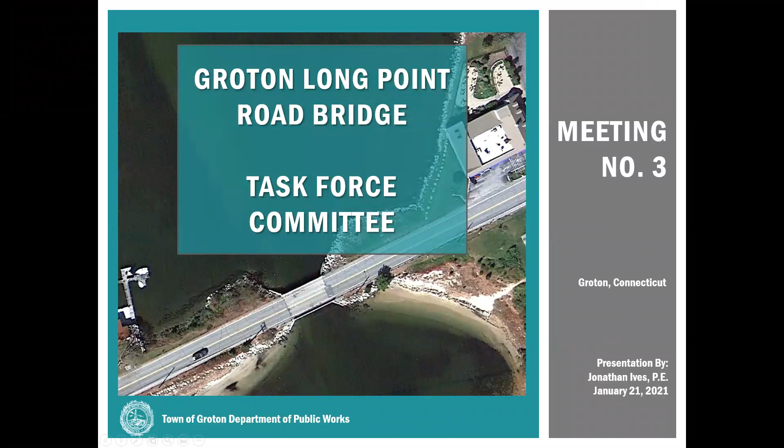All right, I'm sharing my screen here. Is everyone seeing the title page of the presentation? Yes, okay very good. All right, you know both of us at this point.

As Greg mentioned, we'll quickly go over the roadway typical section, and then we'll really delve into the profile tonight and what the design criteria are, so everyone has a good background on that, and what the right-of-way impacts are of meeting that design criteria or some kind of compromise thereof. Hopefully that'll generate some discussion and give us some direction going forward. So that's the major goal for tonight.

The typical section we discussed briefly last time. The minimum width for the roadway here will be based on ConnDOT design criteria and construction staging, and we come up with the same width needed for both. We're proposing two 11-foot lanes, two 5-foot shoulders which will double as bike lanes, and one 5-foot 6-inch sidewalk. The limits of where that sidewalk starts and ends in relation to the project limits are to be determined. Right now we're assuming that the sidewalk basically starts at the bridge and continues east to Esker Point Beach.

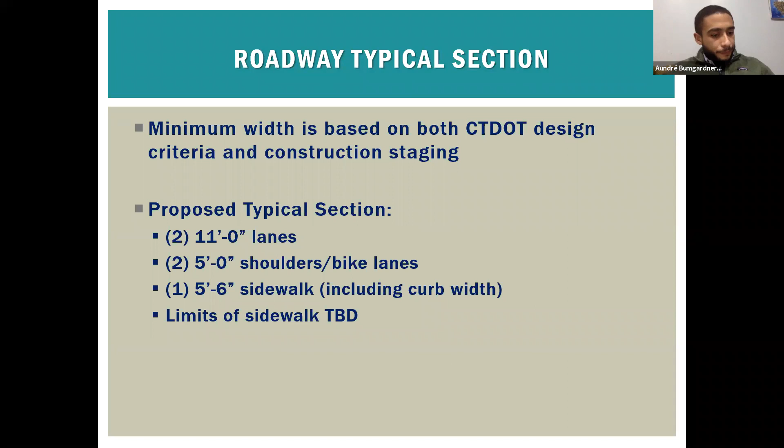Yeah, this is Dave McBride. That's a great point, I'm glad you brought that up. In the busy season it's not as much of an issue, people slow down because it's busier, but in the off season it does — people tend not to slow down once they cross the bridge from the rail bridge. So if that was feasible, that would be something we should probably consider.

Yeah, this is Clarence. I do go by there almost every day, living in Mumford Cove. I think cars do go slower in the summer — there's kids on the bridge, it's narrow, and people do slow down. Coming into Groton Long Point, cars tend to go slower because they're coming up to a stop sign anyway, and the speed limit's 25. It drops to 25 just before, as you come around the curve just over the railroad tracks.

But leaving, I think sometimes people do speed up from the stop sign in the off season and go over the bridge faster than 25 miles an hour, but not much more.

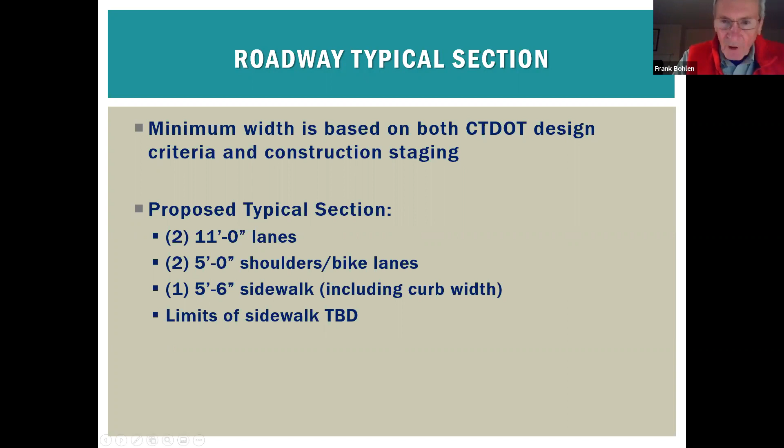And this is David again — do we know what the width is currently, as a comparison? I just told you, I measured it at 32. Bohlen measured it at 32. So there's no change in the actual width of the lane from the current — it's 11 feet currently.

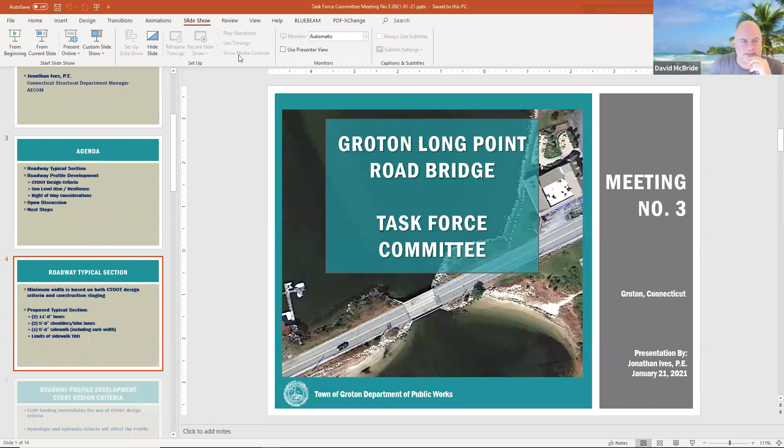Is that safe to assume? Probably — I'm gonna guess at 12 foot now, because that's pretty standard from state highway design back in the 50s, 60s, and 70s when it was put in.

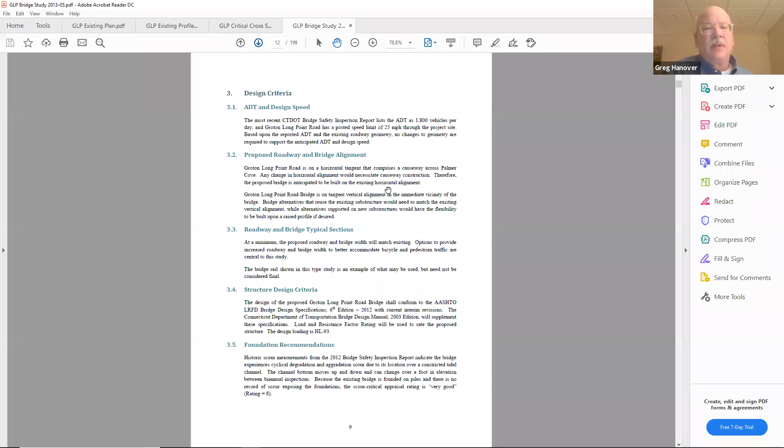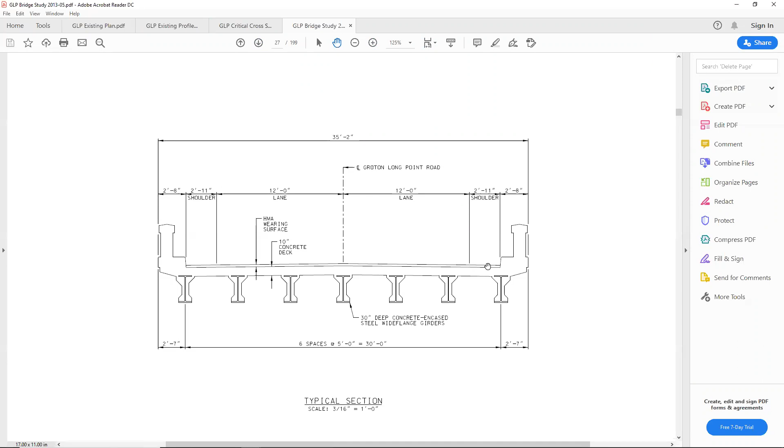Forgive the scrolling, this is what I had for the existing condition. Yeah, it's 12-foot lanes and 2-foot 11-inch shoulders. And you do have striped shoulders out there now. So yeah, that's about right.

Thank you. Yeah, I can also check with our police department — I know we did a traffic study or count study a couple of years ago at this location for this project, and I'll see if we actually captured average speeds and stuff as well, if that's helpful to you, John.

And I can offer this too — what we're showing is the minimum width that we think we need for stage construction. But if you had 11-foot lanes and 5-foot bike lanes, nothing would stop you — even if that's what the state said, okay, why can't you have 11-foot lanes? Nothing would stop you from coming back later and striping that buffer zone if you wanted to. If you striped for 11-foot lanes and 5-foot bike lane/shoulders to start, and that was what the program made you do, you could always come back and change that — with striping it's easy, right?

Yeah, yeah. In the summer, you could even put some cones down to effectively narrow the lane and keep the separation. All right.

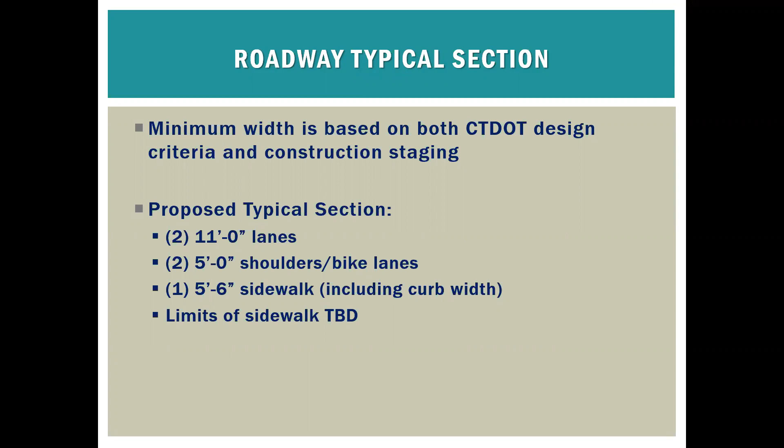All right, so for the profile, we started talking about this at the last meeting. To start, I just want to quickly rehash the criteria — we did get some new information and guidance from ConnDOT. Let me move ahead with that. So because we want to get this in the federal local bridge program to get that 80% funding, that does necessitate the use of ConnDOT design criteria.

And the hydrologic and hydraulic criteria will affect the profile, because that's going to set our minimum elevation with relation to the design flood. So based on the drainage manual and the watershed size, that dictates the design event, which is the 100-year return period event, frequently referred to as a 100-year flood.

And the drainage manual says you need 1 foot of freeboard — that's the distance from the water surface elevation to the edge of road, to the low point on the road — or 1 foot of underclearance at the bridge, which is the distance from the water surface to the bottom of the superstructure, the bottom of the beams that carry the road over the channel. Was that an 'or'?

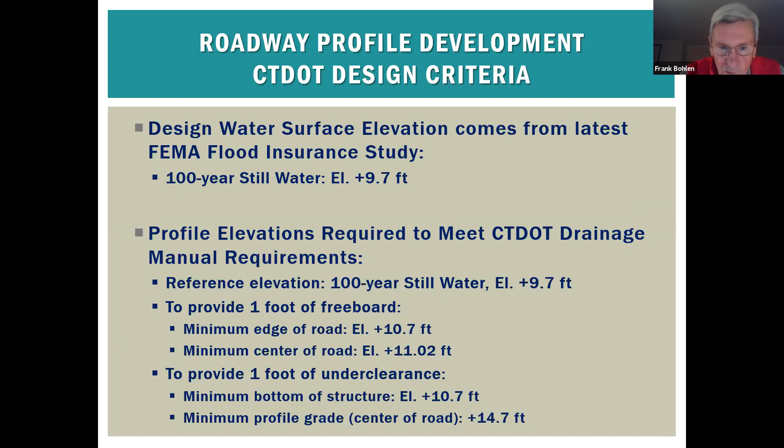As we said before, the design criteria can be waived or relaxed based on economics, environmental impacts, constructability, and right-of-way impacts, which come into play here. Maybe for clarification, what we're talking about here is not just the bridge, it's also the roadway coming to and going away from the bridge. So within our project, we're going to have to address a certain amount of roadway on either side of the bridge just to make up a reasonable profile. You can't pick up the bridge and not pick up the causeway adjacent to it.

So I have a question, this is Clarence. What is the, where, I mean, the 4 point whatever, was that 4.5 square miles, the watershed size, 4.2 square miles?

What's that based on? Because it looks like, to me, in this case, the flooding is coming from the ocean side or the sound side and not from the freshwater side. That's a good question. Even though this is a tidal situation, what ConnDOT uses as criteria for the size of the structure is the watershed size. So you have a 4.2 square mile watershed north or inland of the bridge, and by their manual, that makes this an intermediate structure.

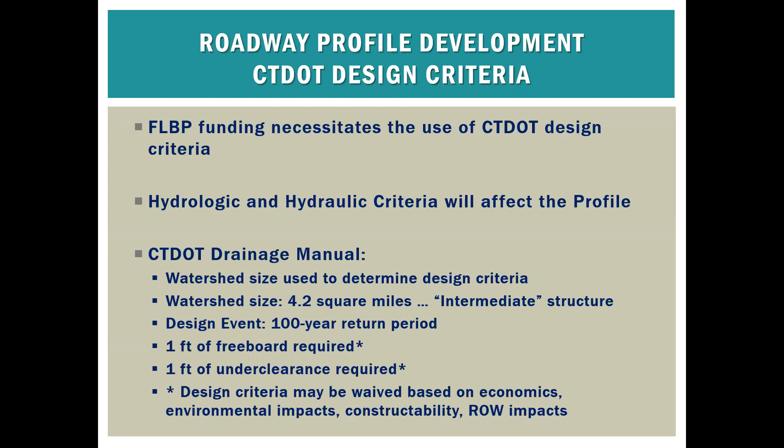If I can just break in for a second, the problem is this is a subject that warrants a little bit of discussion as we get down the road. But one of the problems they have in many of the structures is the post-storm effect. They can't do much about the ocean, it's there, that water is going to get in, it's going to fill up the cove. But then after the storm goes by, the ocean goes down and you've got a lot of water in the cove that's got to get out. And if you look at failure along the shoreline, the majority of the failures you see have happened from the inside out. The structure has fallen into the ocean because they couldn't get the water out, they couldn't support the load from the water in the cove. That's the concern.

Yeah, so that would be a later discussion. Right, okay.

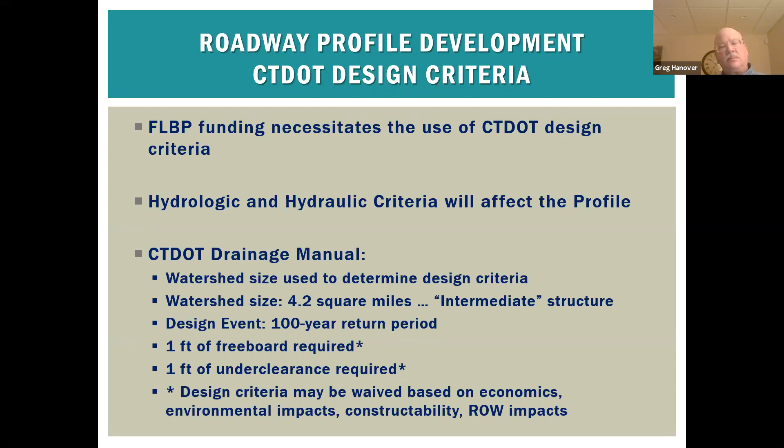So the design water surface elevation based on the drainage manual comes from FEMA, and the latest FEMA flood insurance study has a 100-year still water elevation of 9.7. So for a frame of reference, the low point on the existing causeway is about elevation 8, and high tide is around elevation 1, give or take.

So given that 100-year still water elevation of 9.7, the elevations required to meet the ConnDOT drainage manual requirements would be: 1 foot of freeboard would give you a minimum edge of road elevation of 10.7.

And 1 foot of underclearance would mean the bottom of your structure would be set at 10.7. And, as Frank alluded to earlier, you have some structure depth there. In this case, if we're clear spanning over the existing structure, building a longer bridge founded beyond the existing abutments, our depth could be about 4 feet.

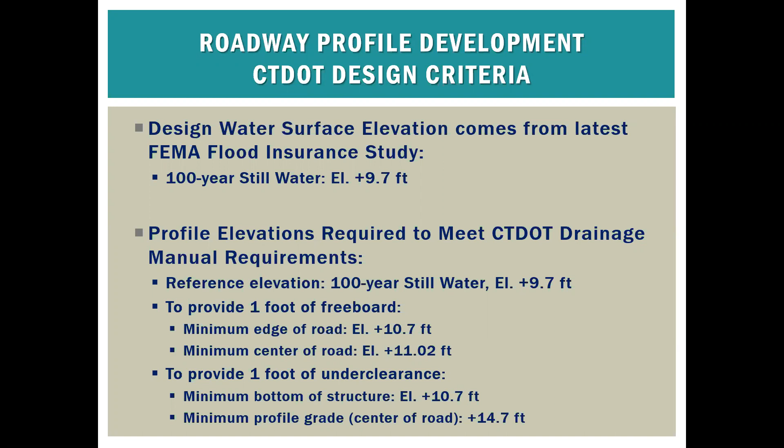So we talked about sea level rise at the last meeting, and I got some clarification from Michael Hogan, who is the head of ConnDOT's hydraulic unit. ConnDOT does not currently require that design water surface elevations be adjusted for sea level rise. Now, that does not mean that we're not going to consider sea level rise in design, but by their standard, their reference elevation is the 100-year flood elevation in the current FEMA study.

That's their current standard. So there is the Public Act 18-82, which strongly recommends that you consider sea level rise in your planning. And basically what this boils down to is the town is free to exercise judgment in how you account for sea level rise. And again, the recommended sea level rise is 0.5 meters, which is 1.64 feet or close to 20 inches. And it's thought that that is the projection for year 2050.

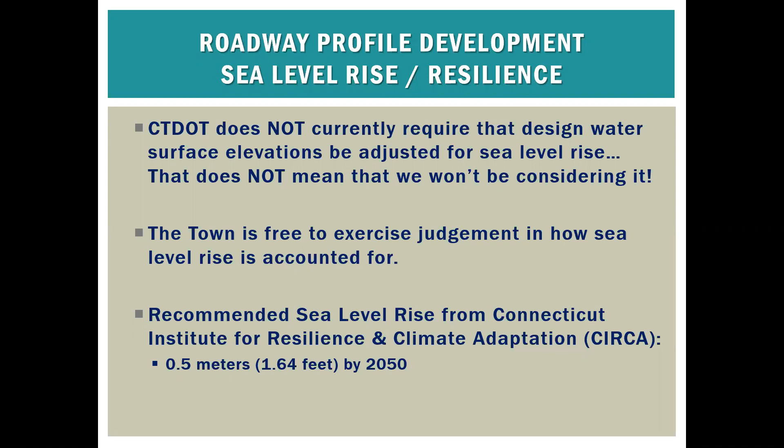So I dug further into the FEMA flood elevations, and this top list here is showing the 100-year still water is 9.7, as we discussed. That means that every year there's a 1% chance that you'll have a flood event that reaches elevation 9.7. The 50-year still water elevation is 7.6, meaning every year you have a 2% chance of hitting that elevation.

Likewise, 10-year elevation is 4.9. That means you have a 10% chance of a flood event at that elevation. And mean higher high water is 1.21. So all of these, the 100-year, 50-year, and 10-year are theoretical design storm events and corresponding elevations. If we add the recommended sea level rise to those elevations, we get these numbers down below here.

This is just projecting that the still water elevations will rise with the sea level rise. And we can, as a suggestion, design to the requirements of the drainage manual, which are...

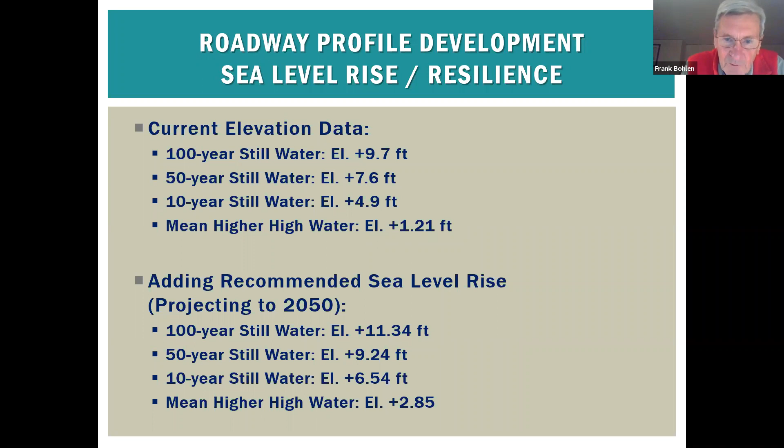Understand. But that's well in excess of your 11.34. So the road is going to be dry in the 100-year storm without adding another 1.5 feet to it. If you were to actually design for that 14 feet and change, I think you'd have some severe right-of-way impacts. So I want to look at those first. Okay, because I know a compromise will be required here. So kind of building up what are the ideal design requirements, and what are the resilience issues we want to look at, and then what are the right-of-way issues. That's the next step. And then we'll have a discussion about what the best path forward is.

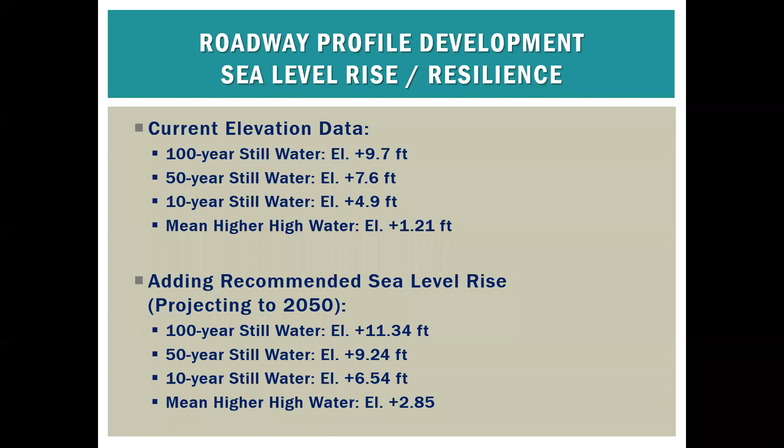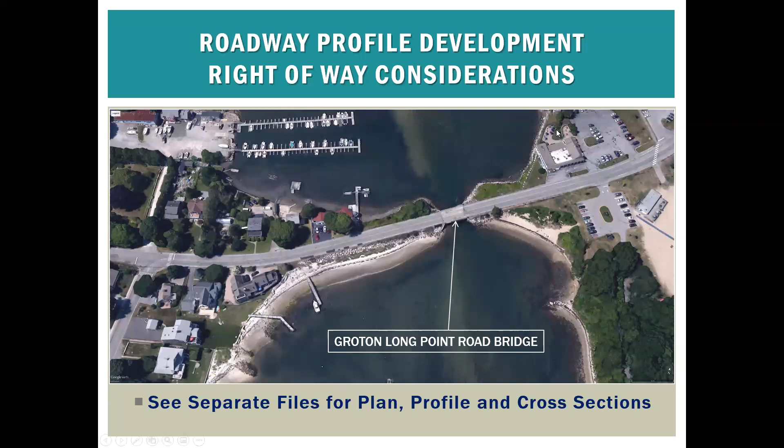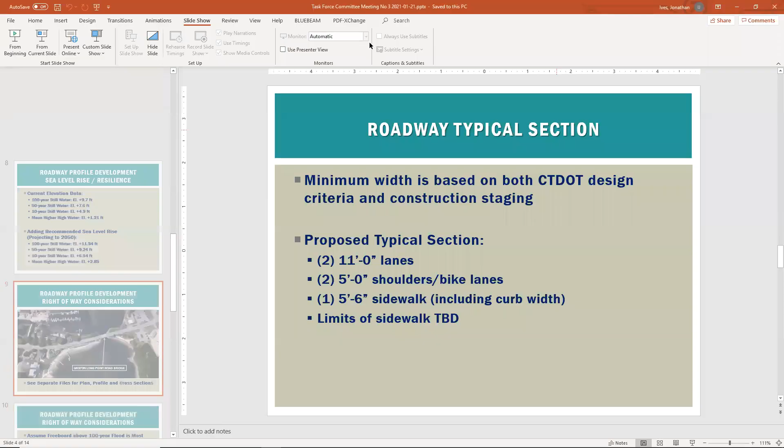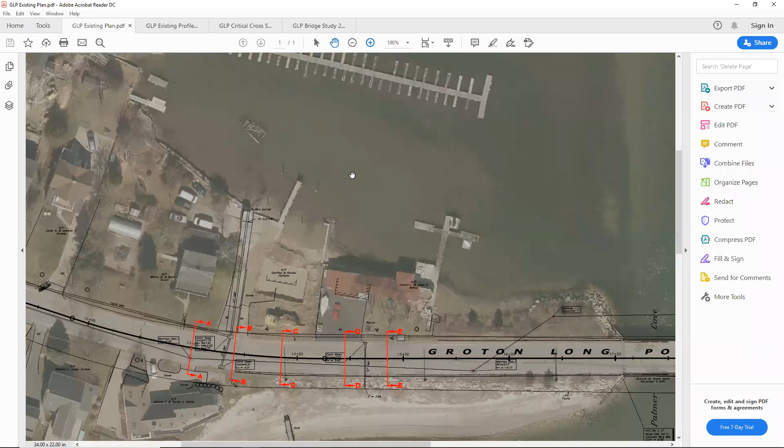So I sent out to this group some separate figures so that you could look at these in detail outside of the presentation. This is where we've cut cross sections. Section AA is at the driveway at 1000 Groton Long Point Road. Section BB at the next driveway, and CC at the next house. Likewise, DD and EE at the next driveway and house to the east.

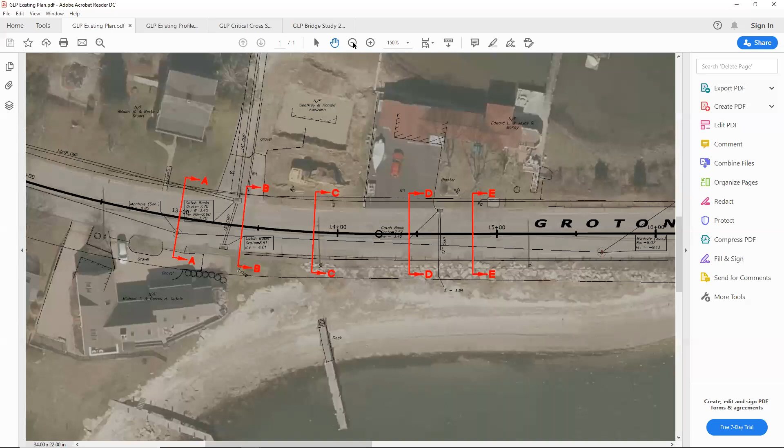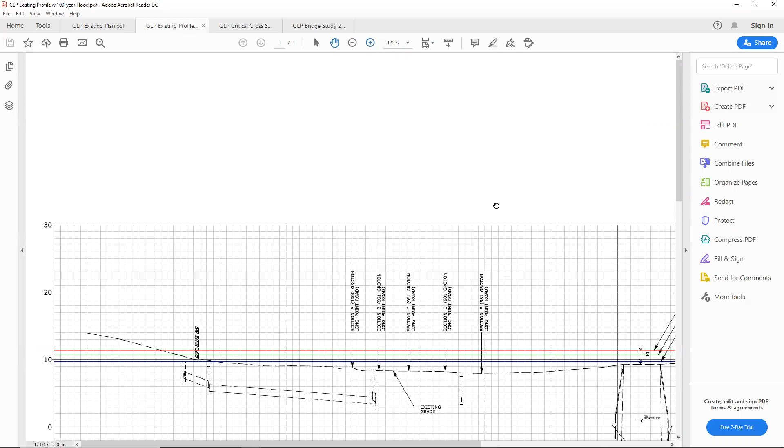Here we have the existing profile of Groton Long Point Road. Here's our bridge and our 5 cross sections that we cut at these houses and driveways. I'm sure these figures may be hard to see on Zoom, but I've got more to follow up.

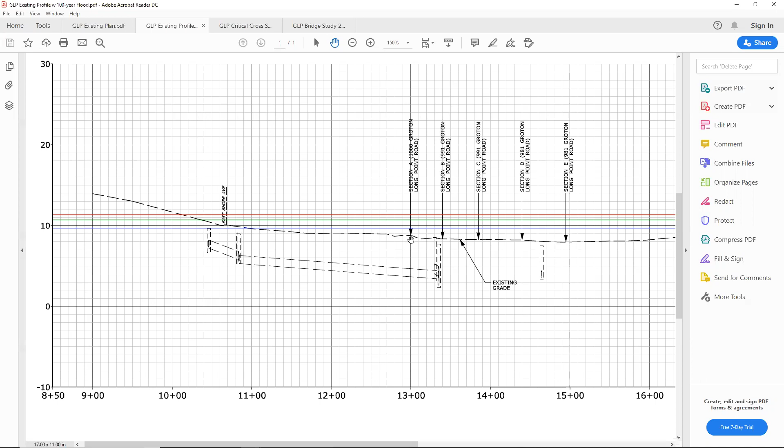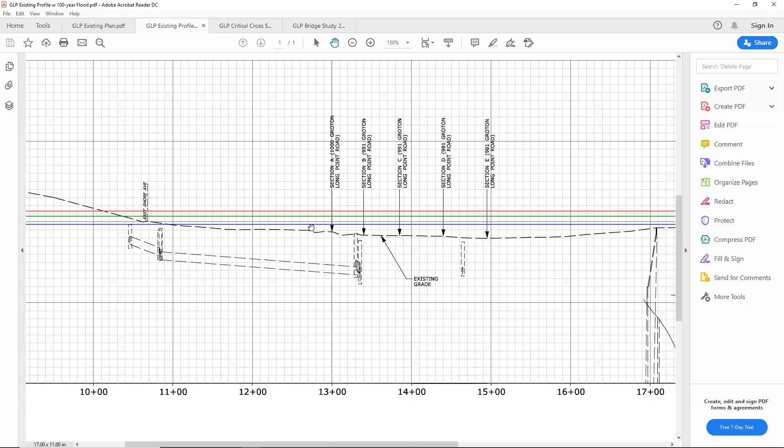The elevation in front of these houses is between 9 and 8 here. The blue line here is the 100-year still water elevation of 9.7. The green line is the 100-year still water elevation plus the 1 foot of freeboard that the drainage manual would recommend. And then the red line above is the 100-year still water elevation plus sea level rise, which brings you all the way up to 11.34.

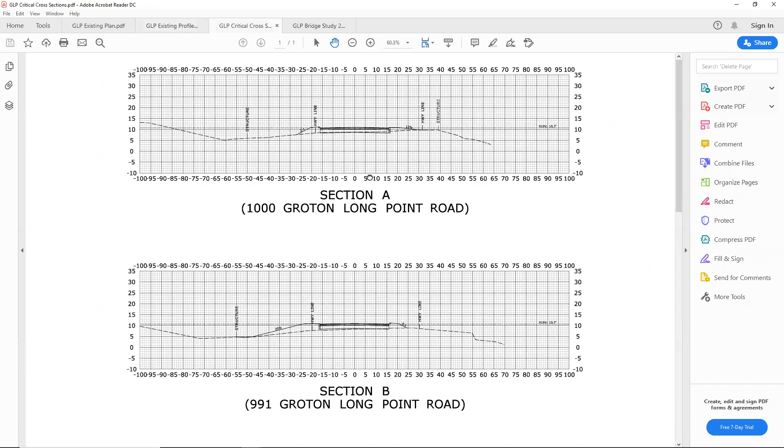Here are our cross sections. What you're looking at is a section taken, like a slice taken transverse to the road. This dashed line is the road. And you're looking east toward Esker Point Beach. The dashed line is existing, and what's solid line work is proposed.

This first section is at a driveway at 1000 Groton Long Point Road. And it looks like if we're to set the roadway for the 1 foot of freeboard here at elevation edge of road at 10.7, we can match in - we're picking up the road a little bit in front of this house, where we can blend in before the property line and the garage.

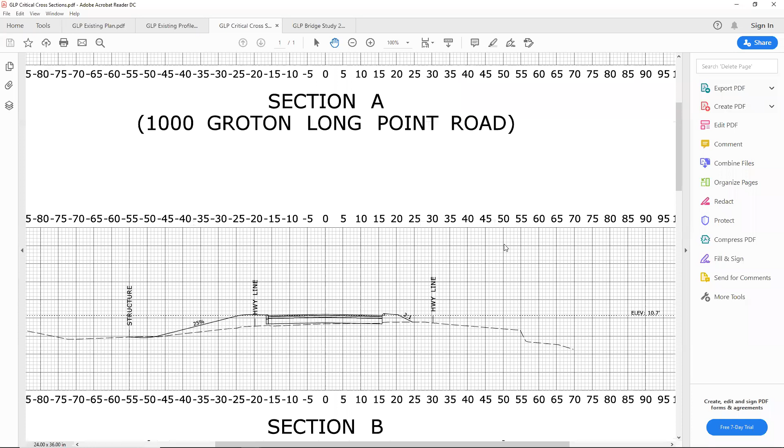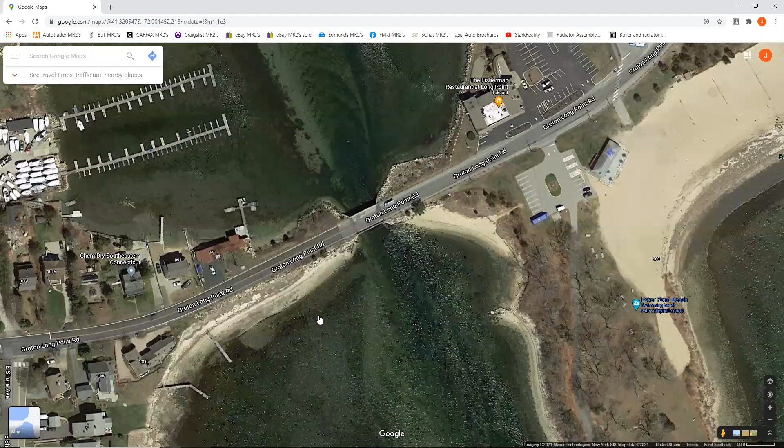Section BB is at 991 Groton Long Point Road. I go to the map here and take a look at 991 Groton Long Point Road. You can see the aerial is in need of update on Google, but here's the current house here. They've got a very expensive Belgian block driveway here.

To meet that minimum 1 foot of freeboard at the edge of road and be at elevation 10.7, this is what the change would be to the driveway here. What we're showing is - I have this in my PowerPoint presentation here - about close to 3 feet of fill. And the driveway would get quite steep. Normal design standard for a driveway would be about 12% grade. And in this case, to have a shelf and a swale in front of the structure for drainage, we're showing a 25% grade on the driveway, which is at most like a 4-to-1 slope.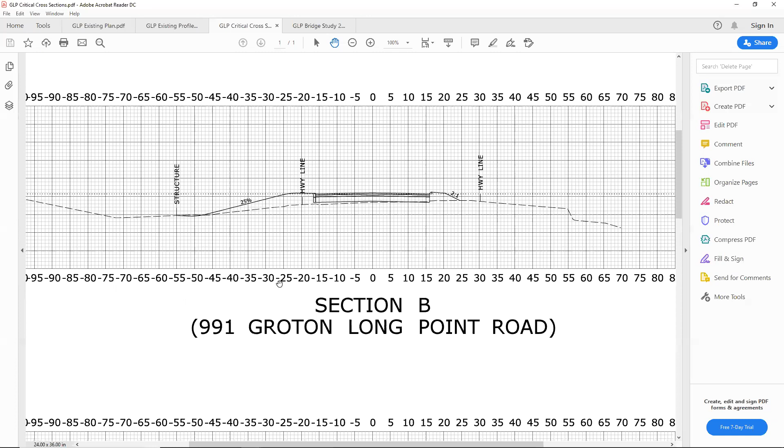So pretty substantial slope. And likewise in front of the house, which is shown on the next cross section, we're showing a 6-to-1 slope because the shelf is not required. But again, about 3 feet of fill in front of this house. And here's the view of the house from the roadway.

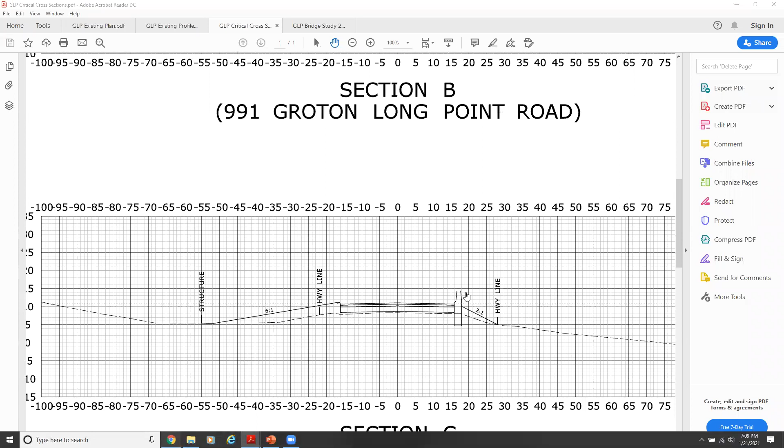And then the next dwelling and the last one before the bridge here is 981 Groton Long Point Road. That's section D and section E. Here we're showing a 20% slope for the driveway. Looks like about close to 3 feet of fill.

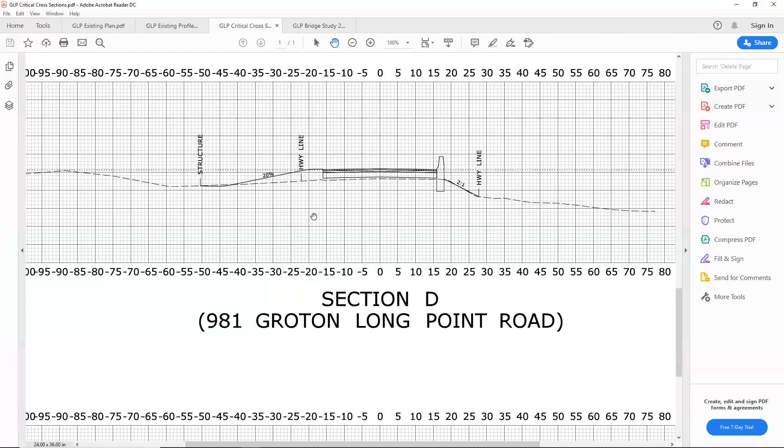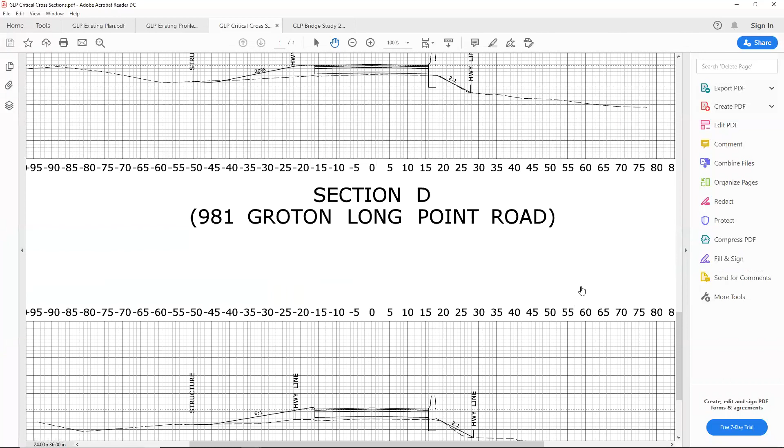Again, a 6-to-1 slope from the roadway down to the house. That means that a 6-to-1 slope is considered to be a maintainable slope for a lawn, which is another design standard. But that means the whole front lawn down to the house will be filled. And again, the whole driveway would be reconstructed just to meet that slope, which at 20% is well beyond the desirable 12%. Now there are a lot of driveways in the state that are well beyond 12%, I'm sure. It's just ConnDOT's design standard.

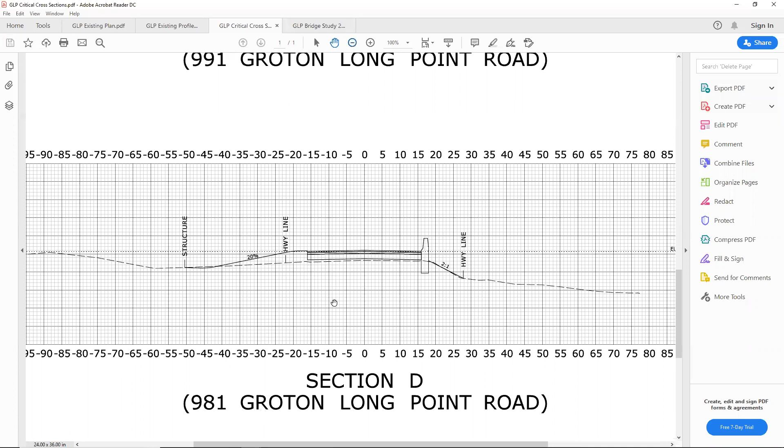So these cross sections are basically just meant to convey, if we try to meet that 1 foot of freeboard for the 100-year flood, what the changes are going to be to these properties and what the right-of-way impacts are going to look like. So we'd be grading well onto the lawns here and redoing these whole driveways. We're filling the road in front of the houses by about 3 feet. And that's substantial and I think worth discussion.

This next slide gives you the approximate fill required to meet that 1 foot of freeboard. This is assuming that we get a design exception from ConnDOT and don't provide 1 foot of underclearance at the bridge. If we provide that foot of underclearance, we'll have to extend that profile out well beyond the bridge to get up to elevation 14 at the bridge, and so these fill depths would increase.

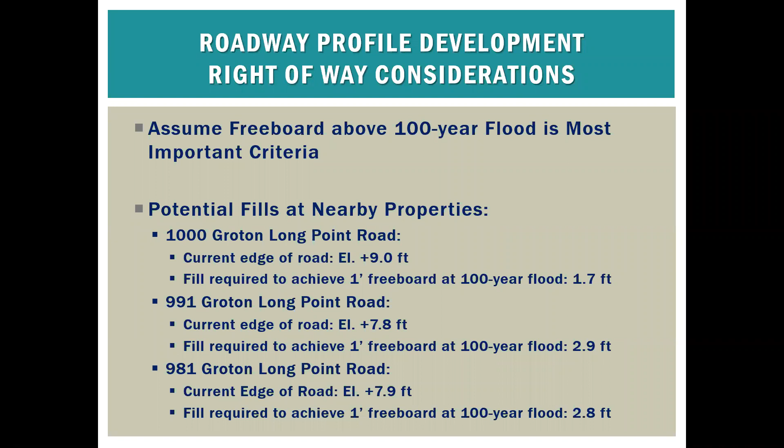This is Clarence. I wonder if instead, I understand the driveways have to be sloped, but is it necessary to slope the lawn, or just to provide almost like a wall instead? It's a good question, we could provide a wall. It's just cost. We could provide walls and landscaping, that might be a discussion with the homeowner.

And also, is it much more costly to relocate the road a little bit more south? It looks like it could be a possibility also. What would be the goal of relocating the road to the south? It gives those two houses a little bit more room from the road.

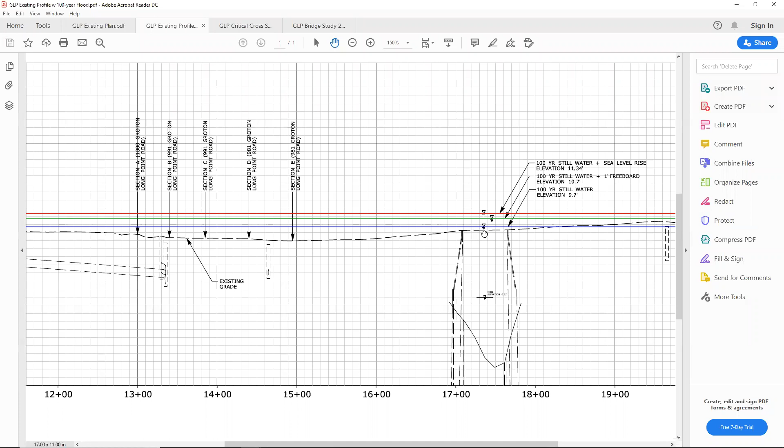What we've done here is to just show the existing profile and the flood elevations and where these sections are cut, so we don't have a proposed profile on here. You can see from this figure that the current bridge is between 9 and 10 at the top of road, so let's say 9.5. And what we've done on the cross sections is to just assume that we're minimizing the profile change to provide that 1 foot of freeboard only and not the 1 foot of underclearance.

Sure. Saying this might be some kind of compromise, and okay, because this is definitely an attainable compromise, what would the right-of-way impacts be? Or do we have to go even further and not provide the 1 foot of freeboard?

This is for open discussion, but we haven't developed a profile that meets the strict requirements of ConnDOT, because we know that they can be relaxed, and we know that looking at these sections, which already have large right-of-way impacts, when we're just trying to get to 10.7, that if we try to get all the way up to over 14 at the bridge, the right-of-way impacts are going to be so much greater that we'll be talking about takes instead of slope easements and driveway reconstruction.

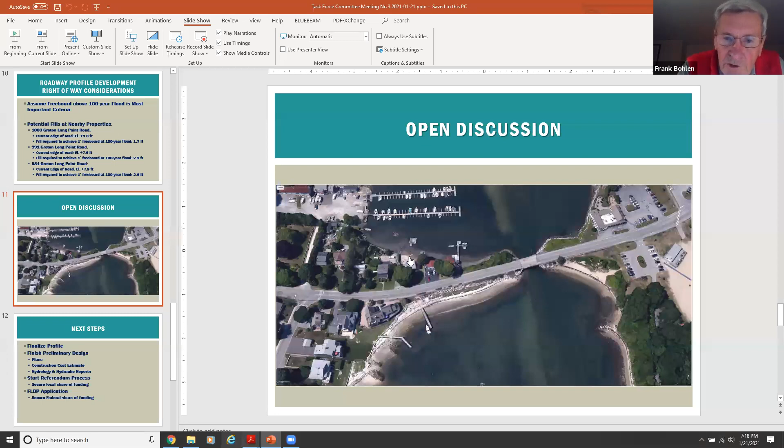Right. Well, if you look at the existing conditions when we have a 100-year storm, a number of those properties are underwater anyway. The existing bridge surface is just about dry in the 100-year storm. And the roadway, as you proceed south and west towards the stop sign, goes down to a low, so that you've got some amount of water on the road in the 100-year storm.

In the current condition, again, that roadway profile is about 8, and the 100-year storm is 9.7, so the roadway is impassable. Right, exactly. But the bridge is just about passable. The bridge surface is you're about at, yes, the 100-year level, 9.7 or something like that.

This is an interesting question, how you go at it. By my eye, the red roof guy, the first one we run into on the north side of the road as I'm coming to Groton Long Point, Mumford Cove, is the worst. It's the lowest lying, so I'd expect the slope to be greatest in that area.

I also think that if you raise the roadway up significantly, that's the house I'm saying you're cutting their view off. It's low, you're cutting it.

If you look at this house, what was here previously was a single-story house. With the new construction, the house has been raised up again, as Greg mentioned to me offline, probably for flood insurance reasons. Could also be for the view.

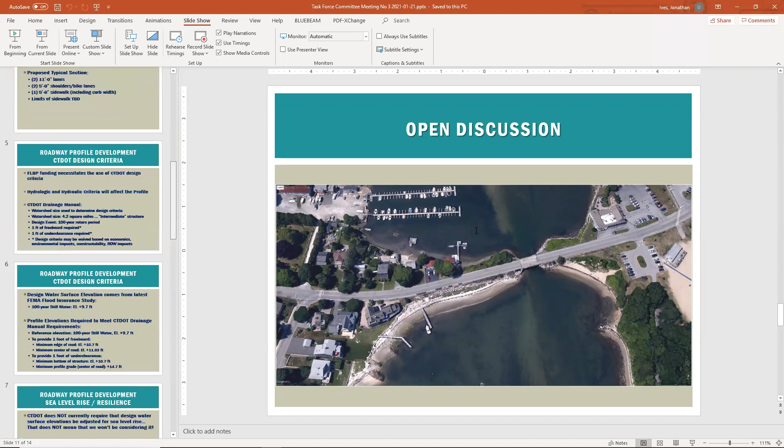I would say that typically at a bridge replacement, at the very worst, we're going to match the low chord of the existing bridge. We don't want to be any lower than the existing bridge. So the existing bridge has a low chord elevation of about, so either 5.6 or 5.7 - substantially lower.

We're talking about picking up - let's say if we had that 1 foot of freeboard as a target, and we said we're going to get a waiver for underclearance. We were at 10.7, and we had a clear span structure that's about 90 feet long. And then that structure is going to be 4 feet deep. That puts us at 6.7. We can probably be a little bit higher at the bridge because we have some room.

We have some room between the last house and the bridge to build up the profile.

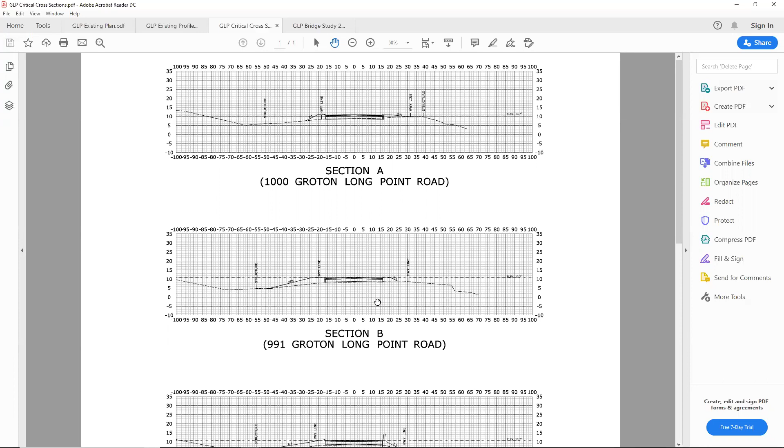Well, if I had to pick a number for a road elevation, for a road surface elevation, it would be on the order of 11.34 feet, which is what I think you told me was the 100-year storm plus 1.5 feet of sea level rise.

Yes. Do you show me that in one of those red, white, and blue lines? Yeah, we did on the profile. We had the 3 lines.

So yeah, if you look at this grid, this is also a 1-foot grid, so you can see, and you can also just do the math. But you know, so it's the red guy, right? Is that 11.34? Yep. And which is substantially below - that's 3 feet below 14.7.

Right, so you'd be keeping the roadway dry, and even considering the sea level rise, you don't have the extra 1 foot of freeboard in year 2050, but that's okay. You can still see the road when you're driving off the peninsula during the 100-year flood.

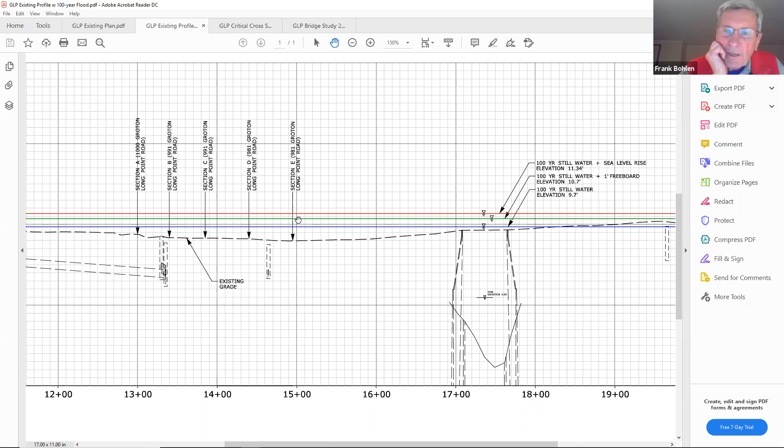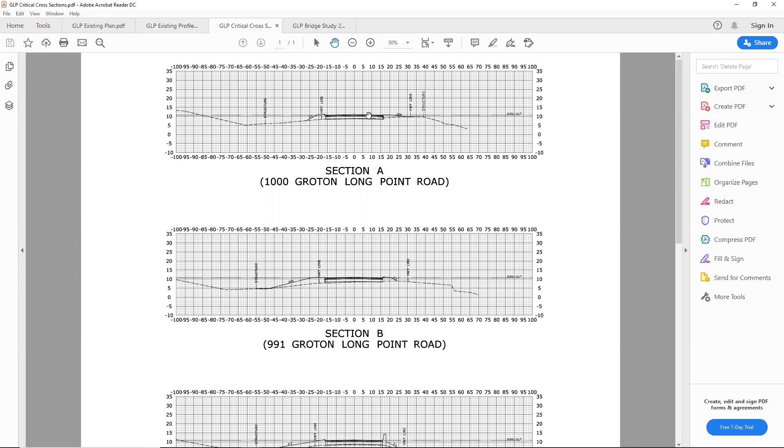Let's go back to the property owner profiles. I guess I'm not clear on what you used as the elevation for that. Was the worst case, was that 11.34? So here we showed 10.7, which is just the current 100-year still water elevation. Right, okay, 1 foot of freeboard. Yeah, I get it.

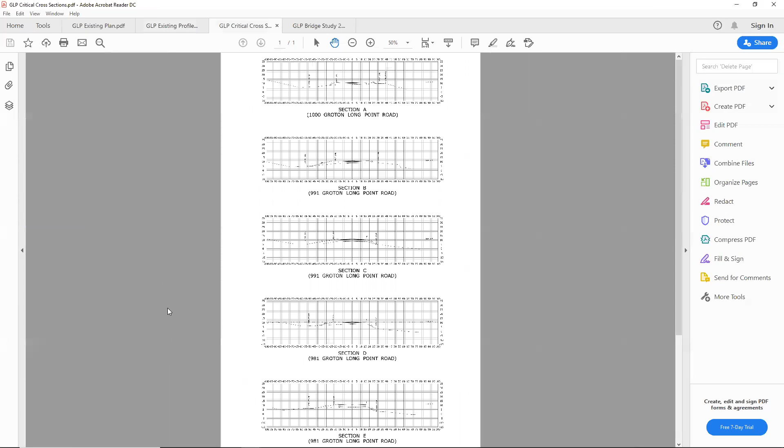And one thing that I'll go back to in the presentation - we said we want to consider the sea level rise, and let's see.

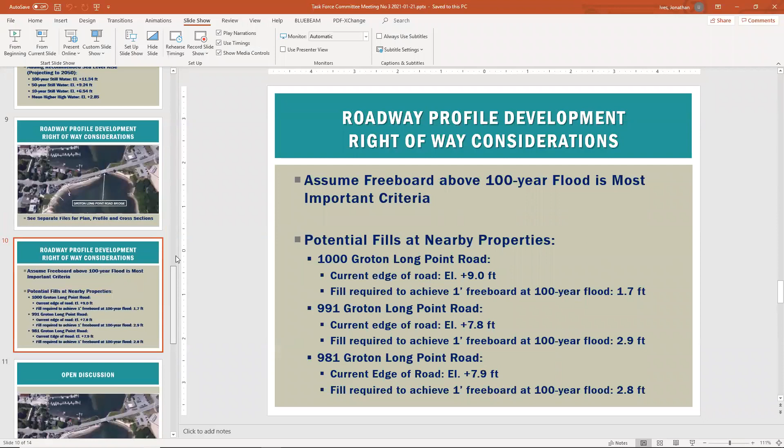That was the point of this slide. So, you can see all of these are theoretical events. The 50-year event plus sea level rise is 9.24. So if you were at that 10.7, you'd be somewhere between the 50 and 100-year event, projecting for sea level rise to 2050.

That 14.7 then doesn't even enter our discussion. In my opinion, it's just too much. Oh yeah, I agree, unless you want to do takes there. But again, that would be at the bridge, and you'd try to minimize it as you got away from the bridge. But if you're talking about doing that to have a perched structure, it wouldn't make a lot of sense. No.

But I must have misunderstood or not heard. I thought you came up with that number because it satisfied CTDOT requirements that we had to pay attention to in order to qualify for federal monies.

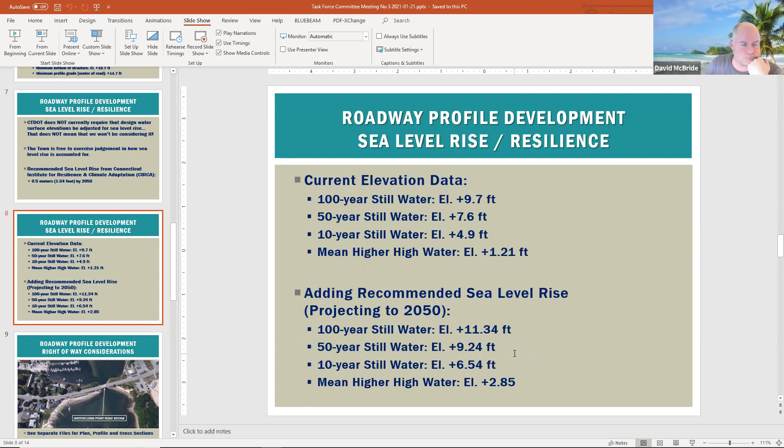I think that's up to the town. I would engage them sooner rather than later. You might get a feel for, I don't know, what the feedback is going to be during design. I think you don't want to be surprised by it down the road.

Yeah, I think at this point, John, we can reach out to those three property owners. We went down the same path when we reconstructed Crystal Lake Road, and that was a DOT project as well, and we worked at their rights of way. They did all the takes and everything, but we did engage the property owners fairly early on. DOT did all the appraisals and got all the rights of way needed. But I think we would probably be looking at that same approach here.

Yeah, they have the conduct rights of way. They are like basically a real estate division. That is their expertise, and they're used to dealing with it. They know how to appraise the properties and what they're worth, and they're used to dealing with the homeowners.

And there's no reason not to allow them to do that, especially if it's federal local bridge program. They'll handle it as part of the program. And then there isn't even a cost associated with having them do that. But there will be a cost to the project to compensate the property owners for any damage.

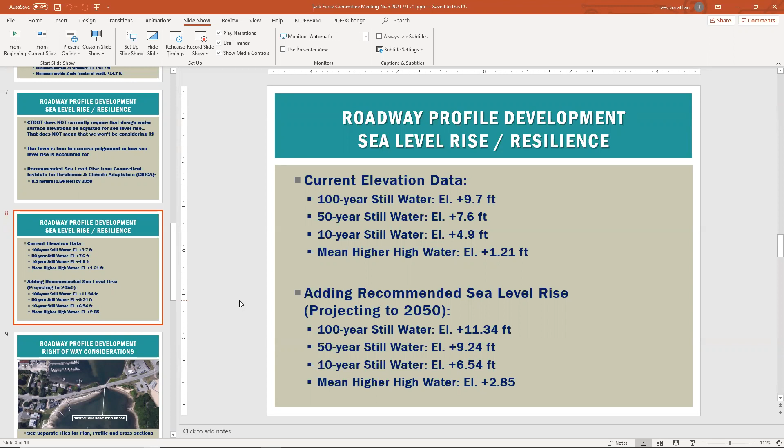Not much more to say. You got all the impediments laid out, now the solution. The solution is some kind of balance. Understandably there's a lot of competing interests here, and I'm sure the property owners would have some different opinions.

Maybe one of the next steps is we should see if the town can reach out to the property owners and start a discussion. I think you're going to have to take some hard options to them in terms of profile, cross-section and elevation.

Yeah, I'm thinking that 10.7. I think that'd be a good one to work with. So we could refine our plan. I know the cross sections can be difficult to look at - show some cut and fill lines and some more detail at those properties, so you could have something to take to the property owners to discuss.

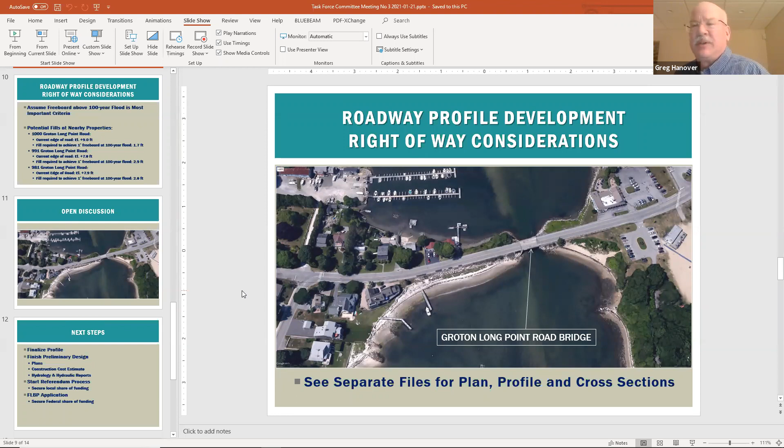Does anybody else have any comments or questions on this profile? Or have we pretty much beat this to death tonight? Well, that's how we get this thing moving forward.

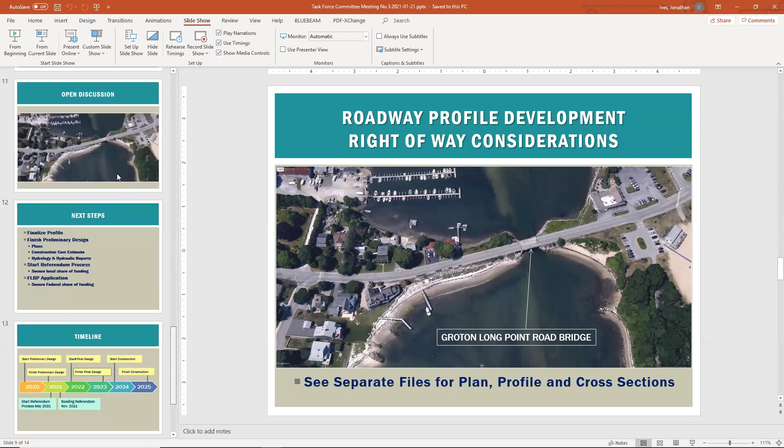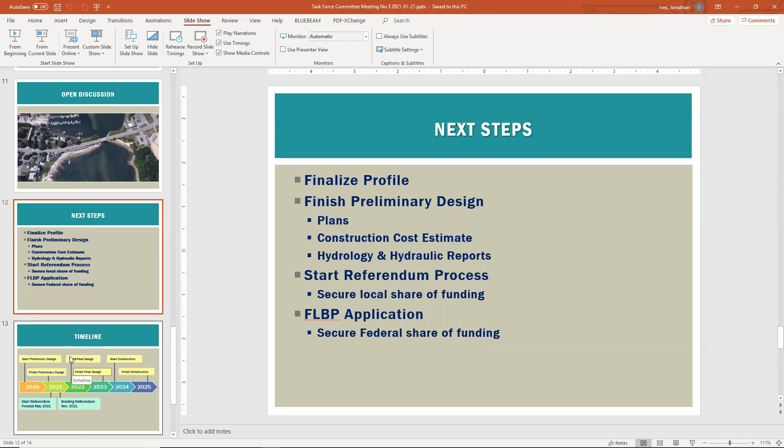If we can nail down that profile, and it sounds like we have some direction on that, then we can move ahead. This doesn't change really from the last meeting, and we're basically on schedule. Hopefully talk to those property owners, get some feedback, and get into design this year as soon as possible.

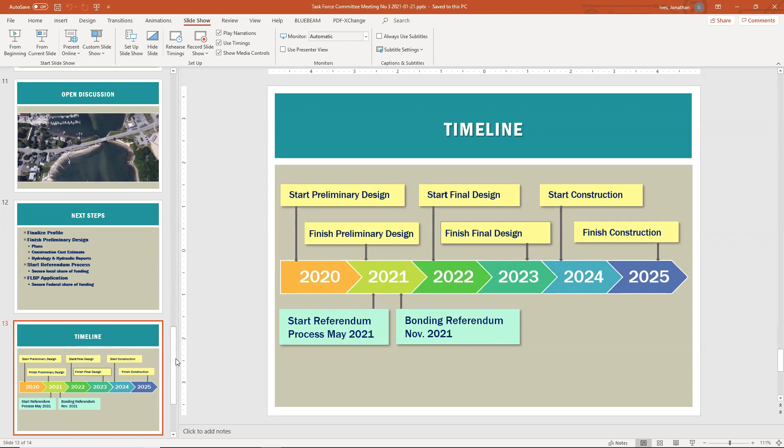I did want to touch on the website development. We still have that web page active out there, and we're trying to get the emails redirected to myself, which we're working on. We do have control of the website now, and as of today there is a filter set up, so you should not keep getting random blank emails.

How about getting some of this new data uploaded on there, kind of bringing it up to current? Looking at - we're recording all these meetings and we have them on the town's YouTube or GMTV website - we've had quite a bit of interest. We've had 48 people, which doesn't sound like a lot, but compared to other committees and commissions out there, we're actually probably one of the more popular meetings that people are looking at. So it tells me there's a lot of interest in this project, obviously. I want to make sure we get as much information out there as we can.

As soon as we can, I'll coordinate offline with you on what you want to show on the website. Okay, that'd be great.

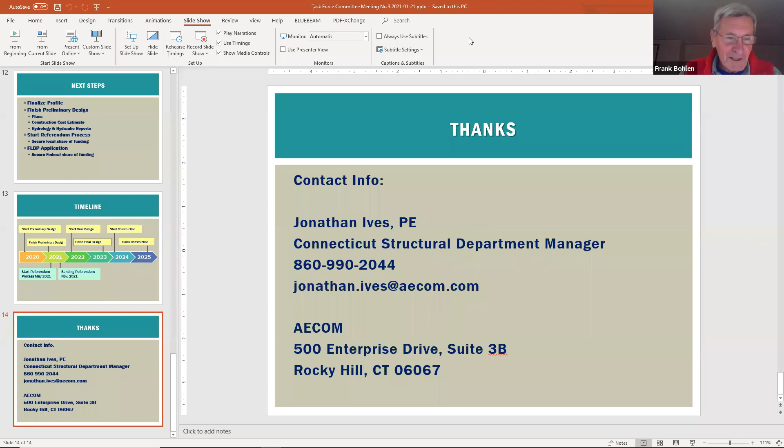Stay well, good night, folks. Thank you, everyone. Happy New Year, stay well. Take care.